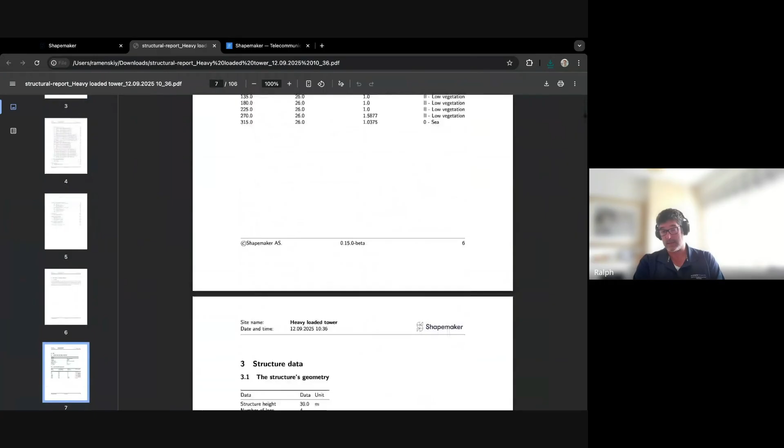An early sign of that was the equivalent static check that's in the Eurocode, was in BS 8100 before it, which you didn't have when we started talking. But through those discussions, you brought it in, you'd implemented the ability to provide the number as the ratio, and some natural frequency and the coefficient of drag as comparators in there. It's not necessarily that the software will do anything, but it gives you that information so you can make a decision based on it. And you'd done that before I'd even bought a license, so the proactivity was already there even before we'd bought into the system.

And I like all of that, and it spoke well of how things were to progress, and they are progressing along those lines. So it's the whole package, not just the software.

Nice. No, Ralph, you mentioned so many things, and it was really wonderful to hear what you said. I wanted to comment on it because that's what our team, myself included, like an industry expert, I worked in telecom for a long time, and of course other people - we are all passionate about what we do, and we really want to make a difference in the industry, and also combining modern tech with the industry.

Basically, we don't want to follow status quo, and as you mentioned, we really follow our users along the way, because not only do you benefit from us, like training or implementing some new calculation methodology, or not so new, like this equivalent static check, but also we get direct feedback from the users. As you just mentioned, you have a stake, meaning you can tailor the software for yourself, because we very much listen to your feedback, and we really value this type of feedback.

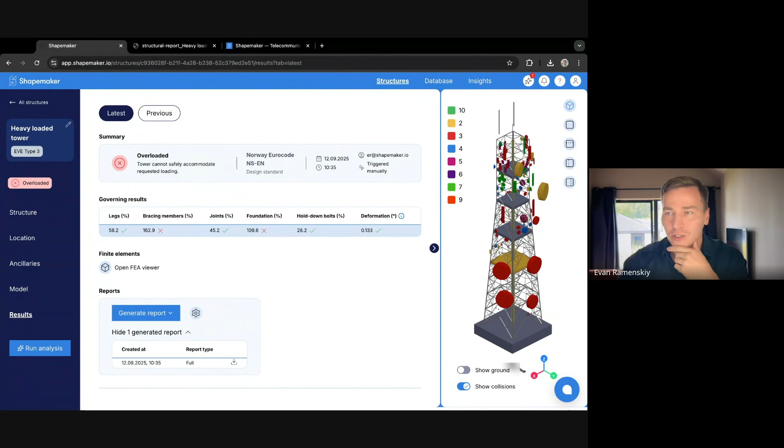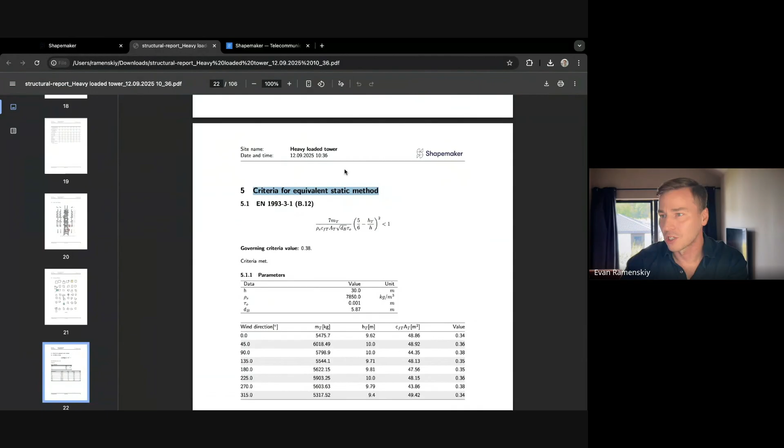That's a lot that was mentioned, and I just wanted, along the way while you talk or I talk, I will be showing the software, and there is one very interesting side that I will be showing along the way, maybe not interrupting, but just showing what you are mentioning if something relevant comes up.

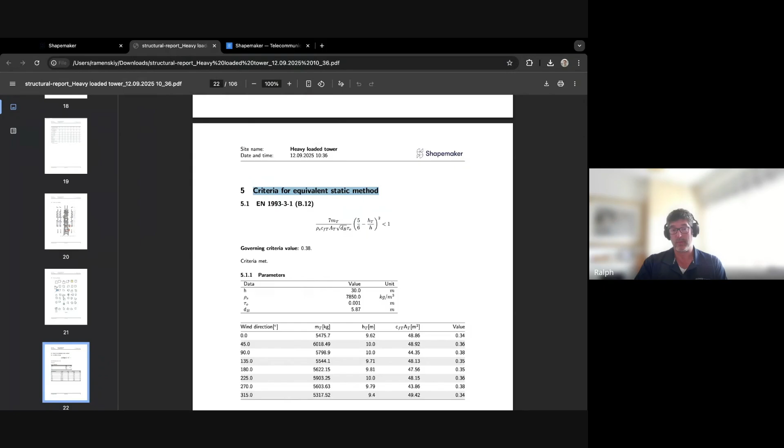So if I carry on about where I want to get to, and we're not there yet even with a reduced number of structures - where I want to get to with Shapemaker is have all of our structures in there. They're all catalogued on a main dashboard, and they're all in there, and they've all been analysed at least once, so they all have a rating overload, the percentages up there on the dashboard, so I can see where the whole portfolio is.

And I think this is something that Andy Dick mentioned in his session with you. It's the ability to respond to the customer that I'm really looking for. So if I have everything catalogued, everything ready for analysis, should a customer call us up or drop us an email, I can make a change, add new equipment really quickly, and give them an answer really quickly. The quicker I can give them an answer, the quicker they can come on the tower.

That helps them with their coverage, it helps us with our revenue. It also means I'm not waiting. I don't have to wait to send it out to someone or get quotes so I can raise a PO. I could probably have analysed this in the time we're waiting for the quoting and the PO to be raised.

I think there will be cases where I have structures that are in a grey area where I don't quite know what they're doing, or I'm not comfortable enough, that I will go back to the OEM and say, look, can you just check this over for me, just so that I know I'm safe. Confidence in the platform will build over all of those checks. I haven't got another piece of software to backstop this against yet, so I can only check it against old BS 8100 analyses that have been done on our structures in the past. But hopefully I'll get to that point.

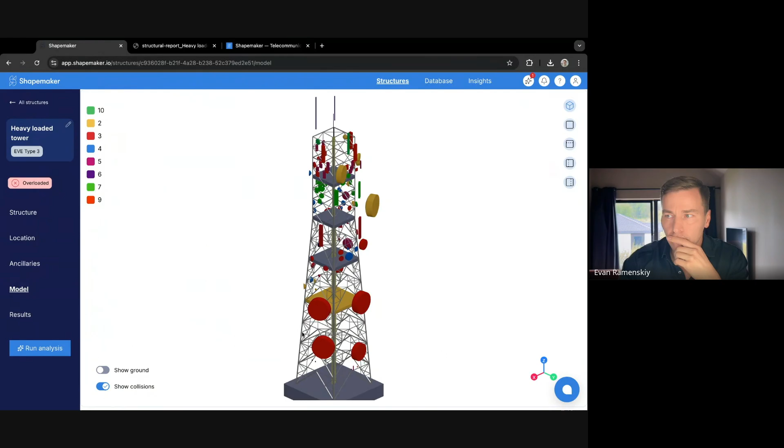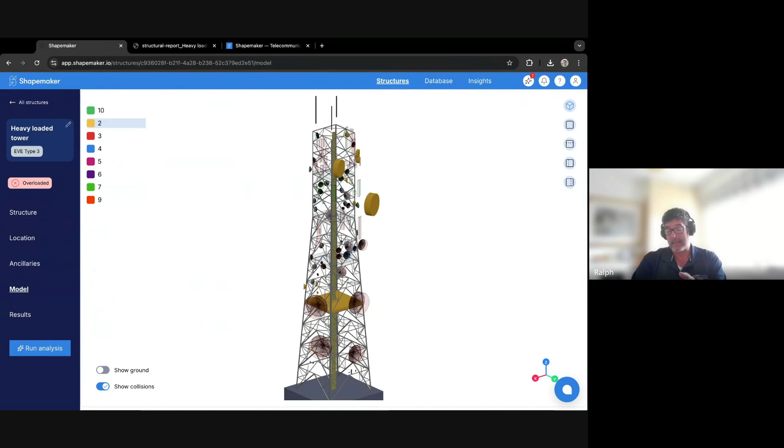But the digital twin side of this is where some of the larger companies struggle to get the information. Once you've gone to one supplier and you've got them to climb the tower, do a full climb down, and collate how the tower's been built, that information then typically resides with them. If you want to move supplier, you've got to pay someone else to do exactly the same thing. In this particular case, you get the information, you build the model, it's your model, you don't have to go and climb it and find out again. So you are building that digital twin.

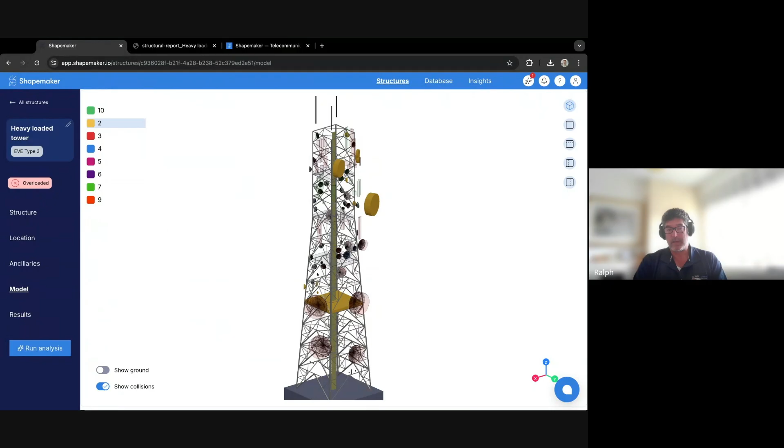It's not photorealistic. A lot of the industry seems to be chasing a photorealistic digital twin, but, and it's just my opinion, I can't do anything with a photo of a tower. I can't analyze it. I can't manipulate the antenna. I can't add new antenna. There are some platforms that will allow you to, but you then can't analyze it. And some of those photorealistic platforms may be moving towards that.

The photorealism is beautiful to look at, and drones certainly have their place. So I'm not knocking drone usage for all of that capture, but a photo of some rust on a tower will always be a photo of rust on a tower until you fix it. And the photo won't change unless you go out and do another drone survey. One of the things about drone surveys is you're reducing truck rolls. But if you're having to take photos after every piece of work, you're not really reducing truck rolls. It's also giving you a model you can't structurally analyze.

I've seen in literature from some people millimeter accuracy on the dimensioning. I've seen on others centimeter accuracy, neither of which is good enough for a structural model. That millimeter that you're out could be the difference between a 5 mil or a 6 mil thick member, and could be the difference between a pass or a failure. That's not really good enough.

But if you climb it once, you get all the information, you build your model here with it, then you've got all the information. You don't have to do all that again. And then it's just monitoring very carefully who's going on your tower, and you do that through an application process. So I think this gives us the digital twin.

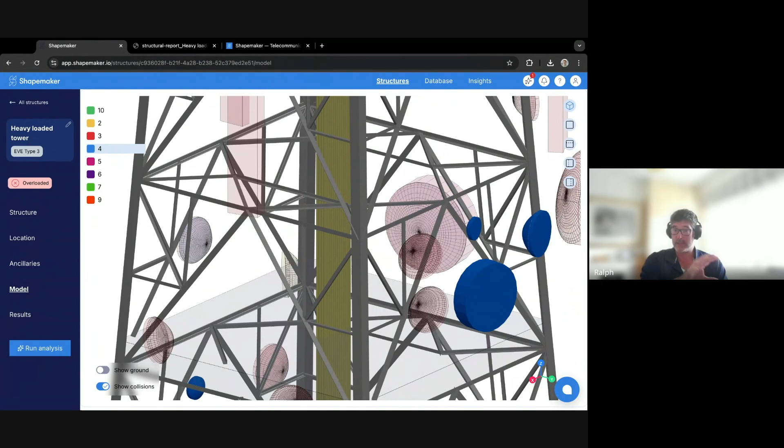It doesn't have to be photorealistic, and maybe that will catch up. My view of the photorealism and the structural thing is that the sort of modeling we've got here is the skeleton, and the photo piece is a nice skin that you drape over the top of it. And whatever you do with the skin can change, but you are in control of the skeleton.

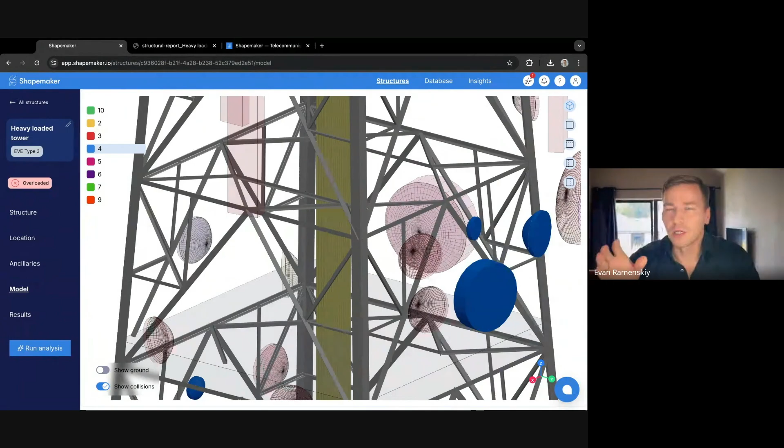Absolutely, I completely agree, Ralph. And of course, we are probably getting into another topic here, because I completely agree. First of all, that the digital twin, let's say drone data, isn't good enough for structural analysis. Maybe it's good enough for, I don't know, active equipment, location of active equipment. So the precision is okay, but what can you do to test, let's say, thickness of a CHS member with a drone? It's quite unlikely.

Maybe there is some kind of new technology that I'm not aware of, but it's probably very expensive at this point. Or test steel grade. Again, it's probably not realistic with a drone. Or go into some kind of deep details. And absolutely about the precision, yes, the millimeter or several millimeters can make a difference in thickness of a member and affect dramatically the outcome.

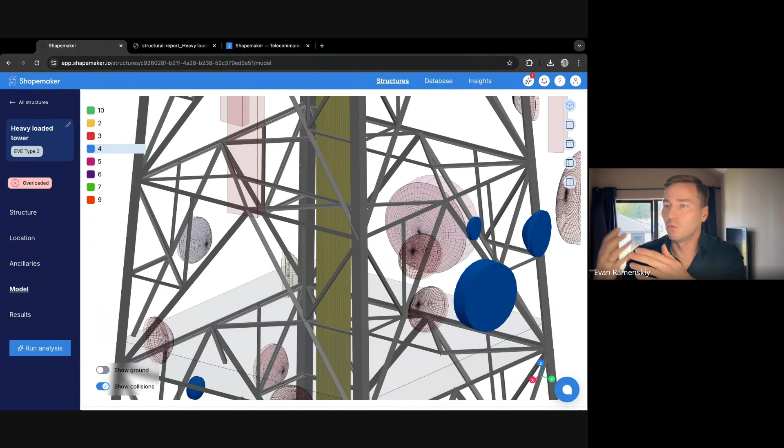So that's why we also took this approach of we are not having a photorealistic digital twin, but we have all the details inside of this digital twin, so we can conduct extremely accurate structural analysis. And this is our kind of bottom line. We want to conduct structural analysis to the most accurate level possible, and that's what we're trying to do.

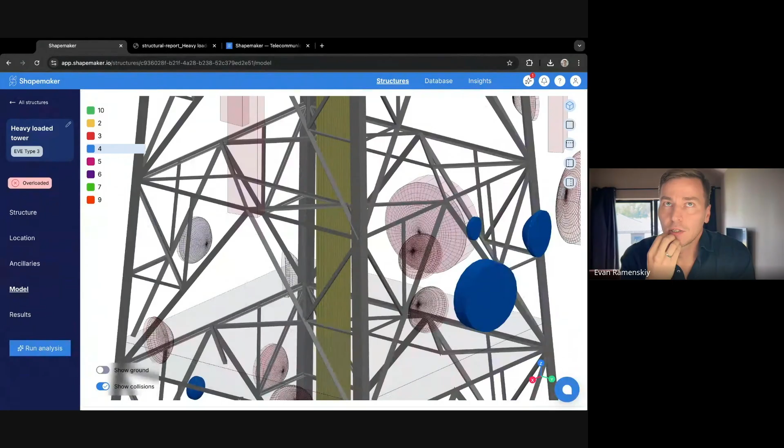But what you said is actually very interesting about drones and maybe some other companies that provide other services, and you talked with a few of them. Maybe shout out to the Ixos guys. Hopefully someone is on the call from there today. But what I wanted to say about partnerships: can you comment on partnerships and how you see it, and integration between platforms such as Shapemaker and Ixos?

There's Yusuf giving thumbs up to you, Ralph.

Thanks, Yusuf. Okay. Yeah, so I've also been playing with this ICNIRP compliance tool that's Ixos, and it's easy enough that someone like me with very little experience can use it, or also with a lot of help from Yusuf there. And there's a fair amount of the Ixos tool that's web-based, and it works off of a 3D model. In the case that I've been using, buildings, but ICNIRP certification is still needed for towers.

So my initial sort of query into the Ixos guys, and I think I discussed it with them while I was on a call with them, and then I discussed it with you. Well, I discussed it with Martha Elise, I think, and she took it to you, and when I emailed you, you had already sorted out a meeting with Yusuf.

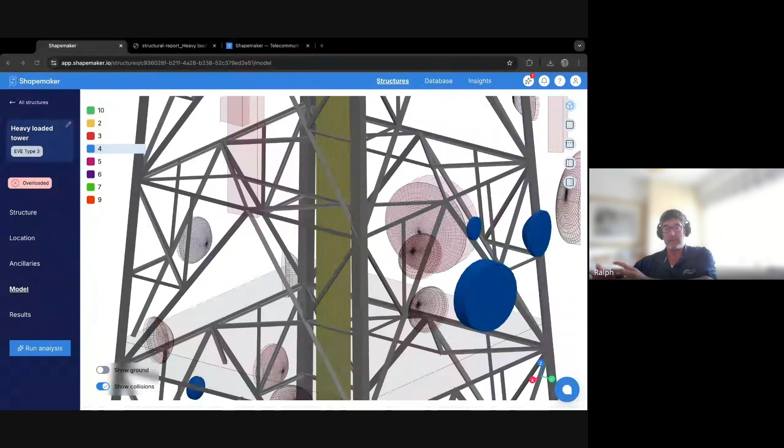But the idea was, if you can take the 3D modeling out of Shapemaker and suck it into the Ixos tool, complete your ICNIRP compliance zones, public and occupational, and then somehow suck that back into Shapemaker for presenting, so you have the compliance reporting available on the site within Shapemaker. It's just that all the processing of it happens in a tool that's been made to process all of that data in that particular way.

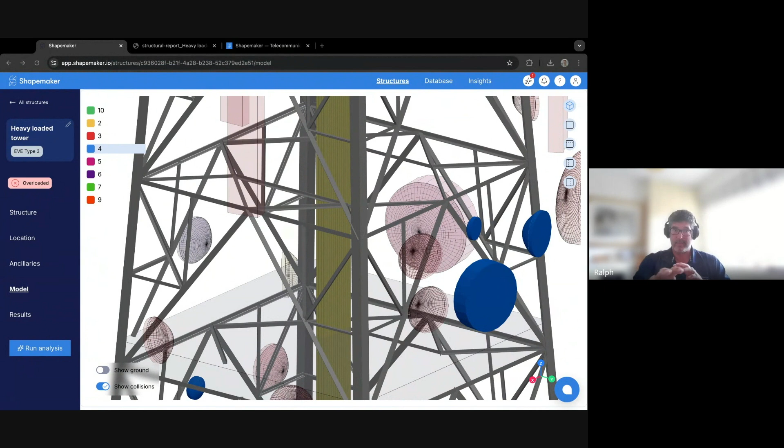So instead of adding and tweaking Shapemaker to do things it was never designed to do, you pick a brother piece of software that you can talk to, to do that processing for you. I think one that came up with Lloyd from Hutchison last week was the finite element piece. So is Shapemaker able to talk to other programs that have been specially designed for a function? Is it able to talk to them, have that function carried out, and then deliver the results back into Shapemaker?

I think we've talked briefly about the possibility for foundations, piled foundations, that sort of thing. Could be a sister piece of software, could be a separate module that happens outside of Shapemaker before the results get brought back into Shapemaker. I don't know, all of those are questions left with you, but with the ICNIRP one, you jumped on that really quickly. It was like minutes, I think, after mentioning it to Martha Elise.

So yes, absolutely. This is actually another key point of building a structural engineering tool on top of modern technology. We have an API, we are basically API-ready software, and through this API we can talk to any other software that is also API-enabled, like Ixos, or portfolio management platforms like SiteTracker or Trebo, so we can pull the data related to, let's say, active equipment, antenna equipment, directly into Shapemaker in our ancillary list of the structure. So we can pull and push all this data back and forth.

So like you mentioned about Hutchison and finite element analysis, any output or any input that we are processing can be transferred. We basically can push to another source and pull from another source some data that we need for our analysis.

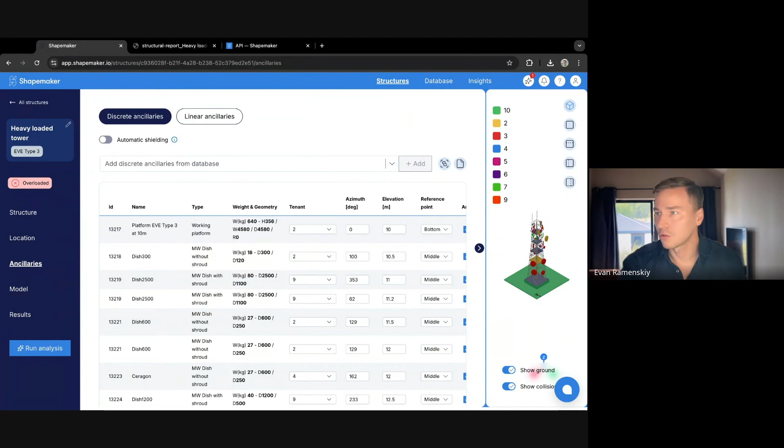So we are not trying to be a tool for everything. We just really want to nail our niche. We want to be the best at structural engineering of telecom infrastructure and operational parts of the telecom infrastructure, related to what you mentioned about the Insight tab and basically a holistic overview.

And to be more valuable for our clients, we are looking forward to such collaborations, such integrations with other providers of different types of functionality in telecom. In my opinion, that's the way to improve and the way to deliver value to clients like yourself and to our companies.

Yes, and I mean, part of the Shapemaker experience is the team that sits behind it. And for me, it's the whole package. It's not just where Shapemaker is as an analysis tool now that's the interesting bit. It's the promise of where Shapemaker can go. Shapemaker does what I need it to now, but what else can we do with it? That's the exciting part. It feels like there's a journey ahead for the software.

And that's exciting. I wanted to ask you a very specific question about features. Of course, you said that you're not a power user, so maybe you're not familiar with all the features that we have yet. But have you used the batch analysis that we have in Shapemaker? Do you know about it?

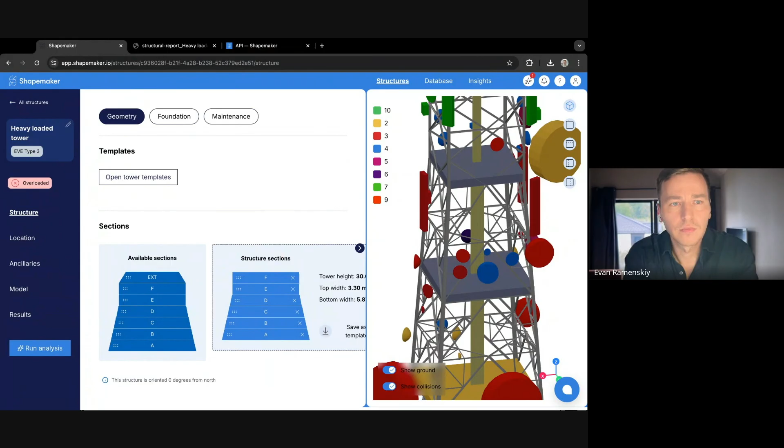Okay, so in terms of the ancillaries on the tower, millimeter precision on where that is, I don't think it matters overly, but you do need to know where it is spatially, so that you know which space you've got available for others to come on. So if your model is incorrect because it's based on yesterday's data, but today the antennas are in a different place, you're going to be going forward on incorrect assumptions on where your space is. So that's sort of critical. Not to the millimeter level, but you need to know where it's based.

In terms of the tower itself and the condition of the tower, also critical, because if there's anything failing, if you've got rust, any defects on the tower at all, you need to be able to make sure that your towers remain accessible for operators to go and climb and carry out maintenance on their equipment. So yeah, up-to-date information. It doesn't have to be daily, but it probably needs to be an information feed from everybody who visits site.

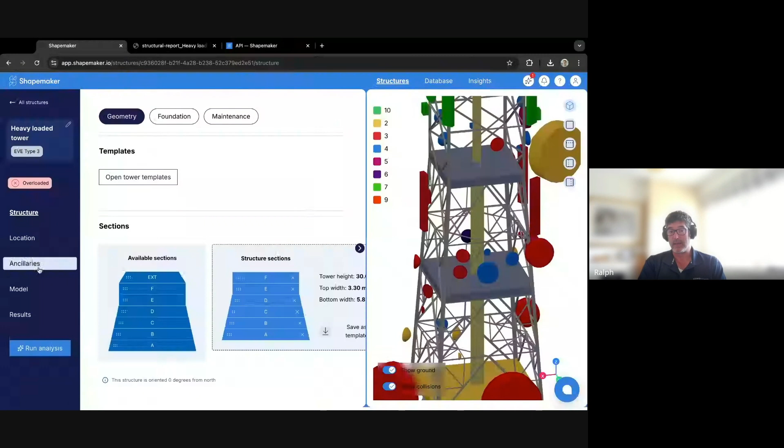Everyone who goes to site is eyes on the site, who can report back if something's changed, if they've noticed something that they need to raise as a point, like the ladder's not fixed at the base, or there's a bracing member that's buckled. You can compare it to old data to take it forward and decide what you're going to do with it. So yeah, as much information as you can get on site as you go through site visits, I think is very important. Yes. Okay.

I completely agree. I just wanted to quickly stress again the value of modern technology, because since we are operating in the cloud, the software can be accessed online on the desktop, laptop, or iPad. The people who go to site, as you said, Ralph, that climb the structure and see some differences from the existing model, it's quite easy, and we have this functionality where we can jump to any antenna that exists on the structure and update the location of that antenna by just dropping it into another place.

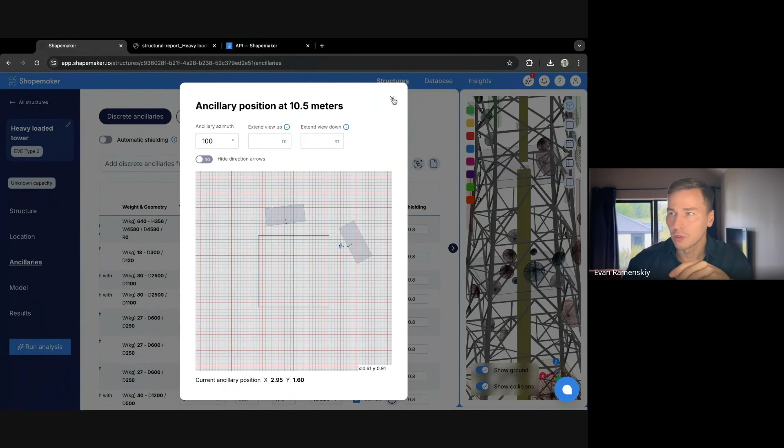And also, as we discussed about communication between different tools or software, we can also pull this data about antennas from another software and update it as soon as it's updated in any software that site inspectors or contractors of, let's say, Icon Tower use. We can pull it, or they can use the Shapemaker software directly. So I completely agree. It's very important, and I see that TowerCos are struggling with this type of up-to-date data, and sometimes they don't even know what's happening on the structure. So it's very difficult for them.

The operators have a habit of sneaking things on out of place. The best place maybe for the operator, but not a place that's necessarily been agreed beforehand. I'd probably not want to let everybody who goes to site have the ability to change things, because you will end up with ever-changing antenna locations based on various people's opinions. So a check process might need to be put in place. So even if they change it on the model, that is parked somewhere for someone to check before it's cleared through to the main model.

Or you have a different way of reporting so that someone sitting remotely can see what changes are needed, take a view on them, and then change it. Yes, I see the point, and absolutely, the TowerCos, and in this case you, Ralph, Icon, basically need to approve every change, so we are not going to allow anyone to make these types of changes without approval.

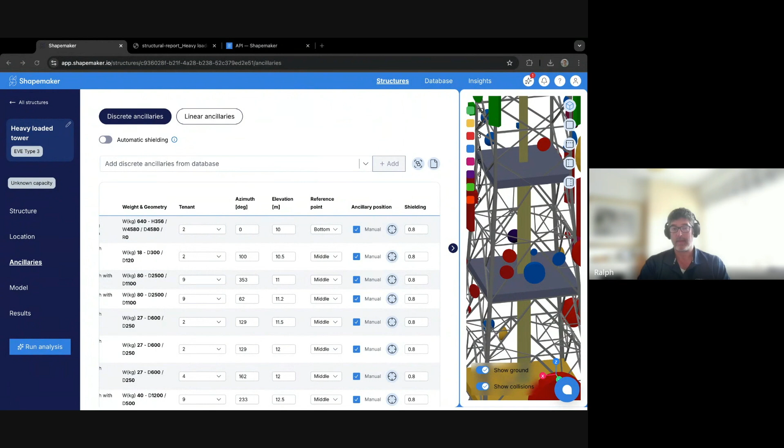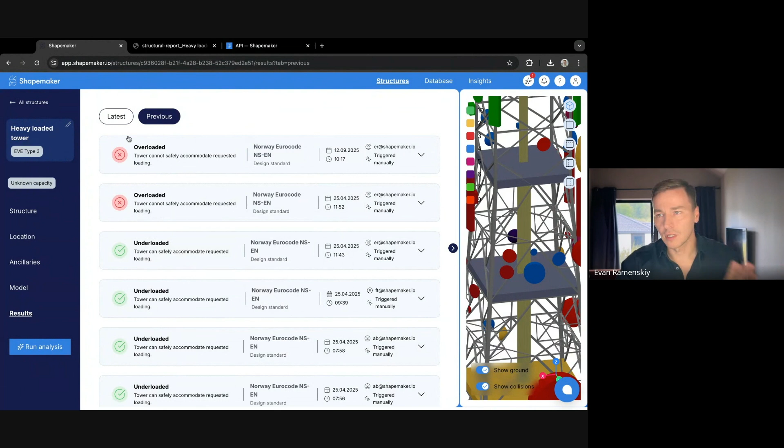Just like we discussed, agents and engineers can conduct calculations, but in the end you approve it as the latest approved status. We have this in the results tab, we have history. As you can see, this structure has been analyzed several times throughout, from the beginning of 2025 until today, and the status is changing. The latest approved status is shown here, and of course, you are in control.

I also wanted to say that we are developing, actually trying to be even better about different agents coming in, whether it's engineering, structural engineers, or maintenance team. Now we are looking at MNOs, and we are trying to set up an even better setup for tower companies.

In the future, a mobile network operator can log into your portfolio, pick from the list of your structures, pick the site, maybe even from a map. We can pick already the right site, let's pick this one, go to the structure, and they can do some changes related to ancillaries. Let's say they do a colocation request, they add some new ancillaries here. Let's add one, and then they can run the analysis.

Let's even run the analysis, and then they see the overall result, but of course it's not approved. They just need to check if it's okay for them, if it doesn't overstress the structure. And then when they're happy, they can do it as many times as they want.

They can send it for approval to you, and then you can approve this colo application, which means less time spent. It actually removes a lot of work and headache from you, and MNOs also benefit because they're free to do some adjustments and make sure everything is correct. They don't have to be structural engineers to run this very difficult full structural analysis. So I think everyone wins in this setup.